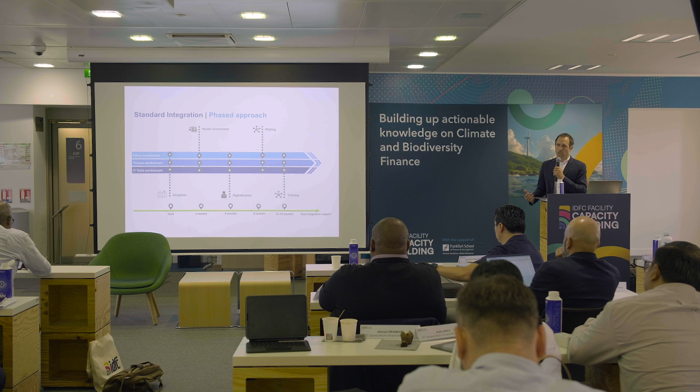We basically look at what countries have, meaning the tasks, processes, systems. Sometimes they have very efficient systems when it comes to project management, or even the use of AI, and Rwanda is a good example. So we look at what's the landscape, then we look at what are the needs from the country, and we customize the platform accordingly. Because one size fits all doesn't work.

So I will show you quickly what it looks like. And as I said, we have 17 countries at the pilot phase, and most of them now have passed the training phase and online support.

So it's a web application. It's available on any browser. And you need, of course, a login and a password. Because as I said, it's the government's tool. It's your tool. No one can access it. But once it is implemented, then the different government officials have a login and a password.

What I'm going to show you here is an example of Brazil. These are not real projects because for obvious reasons we don't have access to the projects, but just want to show you some functionalities. For example, systematic data collection.

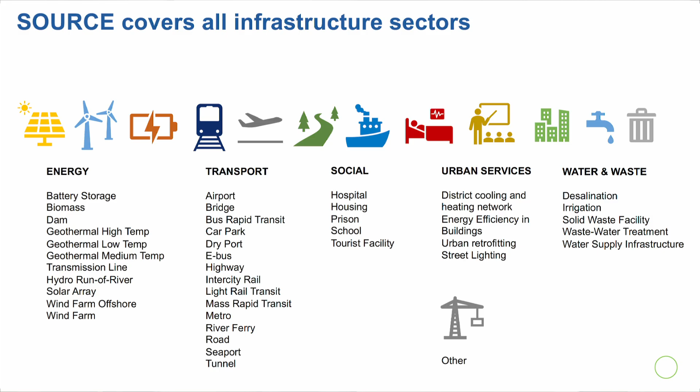Also unsolicited project proposal that was done with PPIAF from the World Bank. Those are the 40 subsectors. So we have developed that with the countries where we are working because sometimes we didn't have some subsectors, so we developed them with them. And when we have a new request, we basically work with the private sector in order to identify what technically should be developed in order to develop this type of new template.

So there are different steps, as you can see here. So some countries it's only 4, some countries it's 5. In Indonesia, I don't remember exactly.

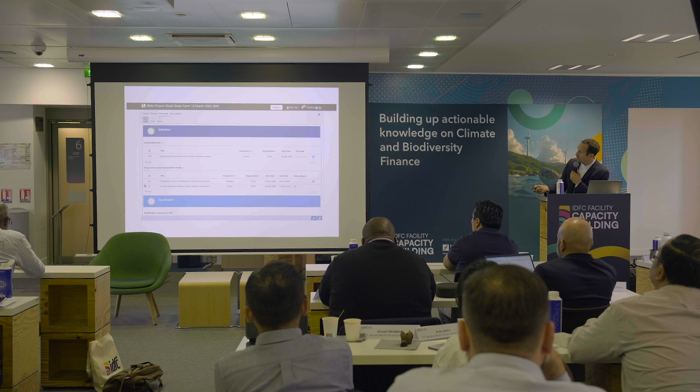And then what it does, it basically, based on the parameters of the project, then it creates different tasks. And it's basically a step-by-step process that the country is going through. So for example, you can see here the task, who it is assigned to, the organization, start date, end date. Very simple project management tool. It's Asana type, or Microsoft Project, or other type of tasks. The thing is that it's not common in governments to have that across ministries.

The objective is to make sure that from one ministry to another, all the different tasks they have to go through are actually digitalized, and then they just have to go through a step-by-step process.

So who are the users of the platform? Well, it's usually the project officers from the different line ministries, because that's where the data is coming from. Sometimes it goes through the Ministry of Planning, like in Indonesia, it goes through Bappenas, because the requests go through the planning, then through the process, and then MOF is involved, and others too.

In South Africa, the projects are sent to ISA, Infrastructure South Africa, which is under the presidency, but the projects come from the line ministries, and then ISA validates whether a project is priority or not. But then Treasury is also involved at some point.

In Brazil, it's both, from the line ministries, but also from the presidency at PPI. So usually it's project officers, but then sometimes in countries you have gates when the project has to be approved to go to the next step. Does that answer your question?

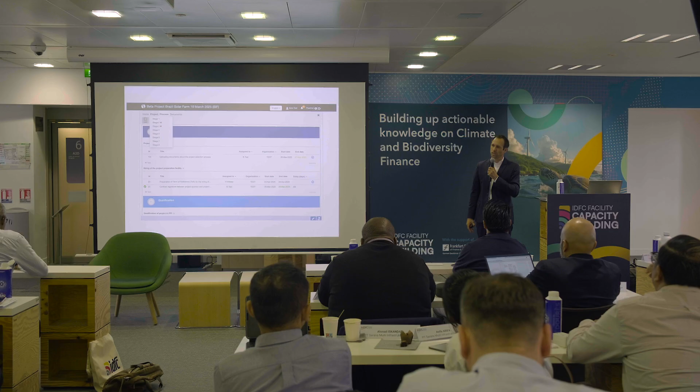I'm from the DBSA, and we also fund projects in preparation. Some of those projects we partner with whichever respective department wants to, say, eventually issue an RFP for PPP, and we would fund some of the development work. I wanted to find out, is this something that could be useful for us at DBSA to monitor the progress of that project, so we see what's happening on the government side as well? Often we rely on the steercos to get updates, and it would be good if we could have viewing rights or whatever to this, because we also have a vested interest in the progress of such projects.

It's a good point, and as you know, South Africa is going to go through a major restructuring when it comes to infrastructure, with a merge of different departments. We're waiting for that to happen, which should be around next March. But in the meantime, we are working with Treasury and ISA to move forward, because there is a new platform that will be launched by ISA in August, and we want to connect with them and also work with Treasury.

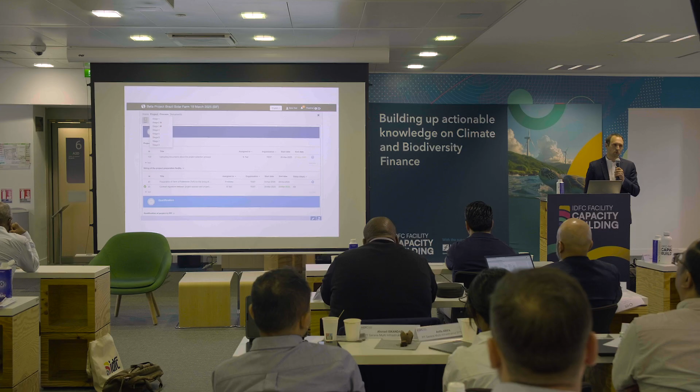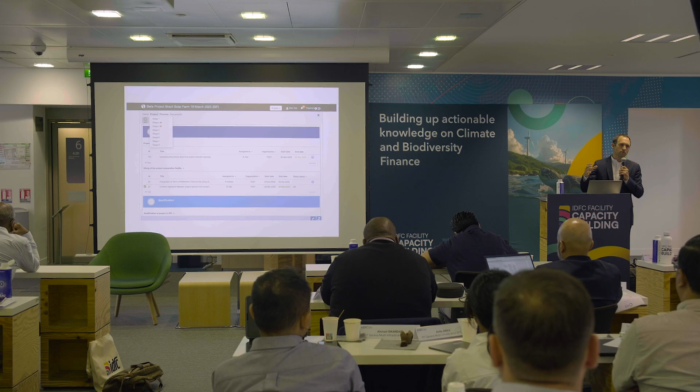This is something we also promote with Bappenas in Indonesia, which has the PPP joint office, so PTSMI is also involved. That's why in some countries it's easier to connect with others. But maybe what's nice here is there's some request you can send to me, and then we connect with the people in South Africa, and we can have a chat. The objective is to highlight what is being implemented, the successes we're having with countries, and how we can make it more efficient for the PDBs.

So the series of questions we have, what we do is align them to the source questions. You remember the templates, the 40 subsector templates? We merge them to make sure that when you go through a project, you're not only going through your task, but also through what investors expect to see when projects are publicly tendered - it can be governance, cost, technical, or legal questions.

You can see that the types of questions we have are numerical, multiple choice, proposed answers, and sometimes we have international best practices embedded into it. Why? For example, here the IFC performance standards - the objective is to provide knowledge and guidance at the right juncture, because project officers have tons of reports they have to read, and a lot of knowledge from our fellows, from donors or multilateral development banks.

They are great, but they are on the shelf, and you have to find the info exactly when you are preparing the project. So, for example, what is an NPV? How do I do a CBA? Or how do I do a traffic forecast? All of this is available somewhere, but you have to find it. So the objective here is to make it available at the right juncture. These are some of the international best practices that we have digitalized into Source.

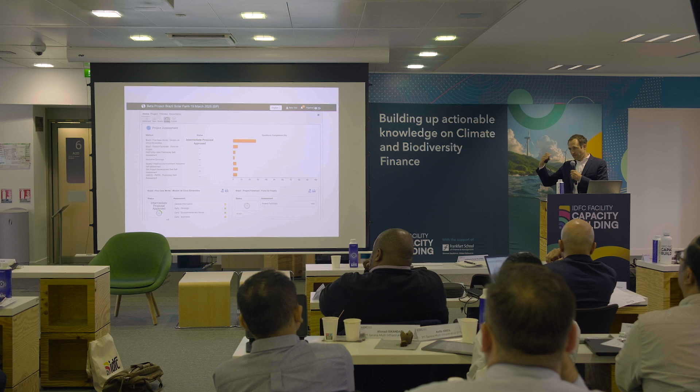So what we did, we just made a matchmaking between their criteria and our questions, so that while they are doing their studies, reports and assessments, and going through the platform, they will automatically be able to see how the answers are attached to what they need. And then they can do a manual go, no-go type of process.

So this is what it looks like in Brazil. You're going to have their different criteria on the left, the completion on the right, and what they decided to score the answers to. And they decided to use a traffic light system.

So you can see here another project assessment that we basically aligned to the source questions. When the project is ready for tender, or whatever the jurisdiction is requesting the government to do, it can be right from the beginning because of the law that it's a PPP, it has to be publicly available right away. The government can publish the project.

What that means is that the government decides when it is publicly available and what is publicly available. So it can be assessments, documents, contact information. There are different ways to publish the different information of the project.

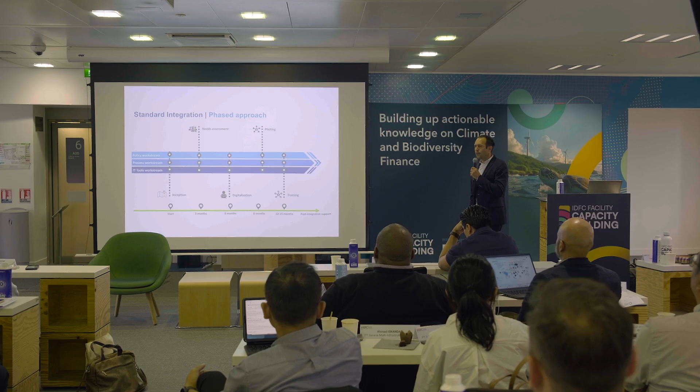I'm not sure if you're able or willing to share, but how much does it cost to implement such a system? Oh, it's publicly available. It's 300,000 euros to implement the platform in a country. It's usually a 12-month program. And what we are working on now with the German government is to extend the assistance.

Because what we realize is that once the platform is implemented, there are so many trainings to do, so many follow-ups, so many people to talk to, and there's a need for clarity with new people, people changing from one ministry to another, change of government. Oh my gosh, it's a nightmare. But what we see is that because we're a public good, we continue to support them. That's why we have post-integration support.

For example, in Indonesia, the technical assistance finished last year, but we continue to work with them. South Africa, finished two years ago, but we continue to work with them on a daily basis. So what we realize is that we should have at least a plus-one-year period after the technical assistance. We estimate, though we haven't tested it yet. We are doing it with GIZ in Senegal, implementing Source there now.

I'm going to Senegal at the beginning of August to launch the platform with the government, and we're expecting at least a year of support after implementation. We estimated roughly 150,000 euros, but also for the local consultant, because we always work with a local consultant. So now I'd say 450,000 euros for 2 years.

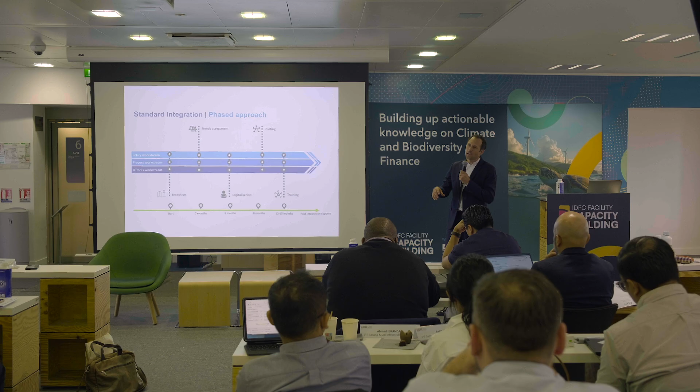We compared ourselves with other consultancies, and we are four times lower. But the reason we can be lower is because we do it at cost, and we also do not outsource the IT development. Everything in IT is inside the team, so we don't outsource anything, and that's where we also save costs.

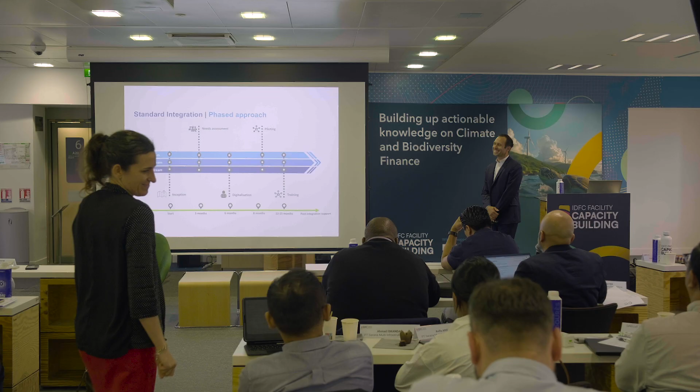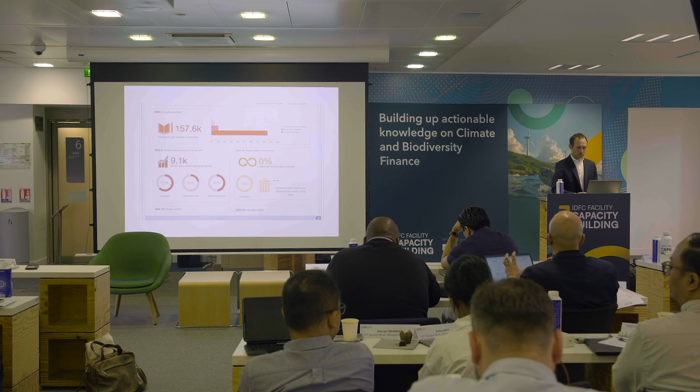I also have some words on AI before the end. Just a question on some of your focus areas on infrastructure. I was looking at the sectors, and I think there's a strong mitigation focus, at least from a climate perspective. I wanted to understand, in terms of climate resilient infrastructure, to what extent—I know that falls under sustainable infrastructure, but in the specific areas there.

I don't know if there would be any adaptation or resilience focused interventions, or is it more mitigation focused? I think it's logical, but adaptation and resilience is not a subsector for us—it should be involved in all subsectors. So we have questions on resilience and adaptation in all the templates, in all the sectors. This is how we've drafted it. For example, we have environmental questions, and a climate section to make sure those questions are properly addressed. The reason we're not doing it separately is because we're working with the MDBs, and we work with the insurance industry.

And the insurance industry has invested a lot of time in reviewing the templates. Why? Because they want to make sure that a project that is insurable is a project that is investable. But to make sure that the project is insurable, they need to make sure that the climate risks, health and safety and fire, contractors management - all these risks have been addressed.

And there is an insurance coverage checklist in the platform to make sure that at least the government knows from an insurance perspective where they stand. And we did that because we work with 14 countries in the Pacific Islands. So the Asian Development Bank is going to fund the integration in those 14 islands, and they need resilience. So that's why we wanted to make sure that Zurich, Swiss Re, WTW and others were validating the need first for such a platform, and then a dedicated tool to make sure that insurance is covered, so that the projects can be insured and you can attract the proper investors.

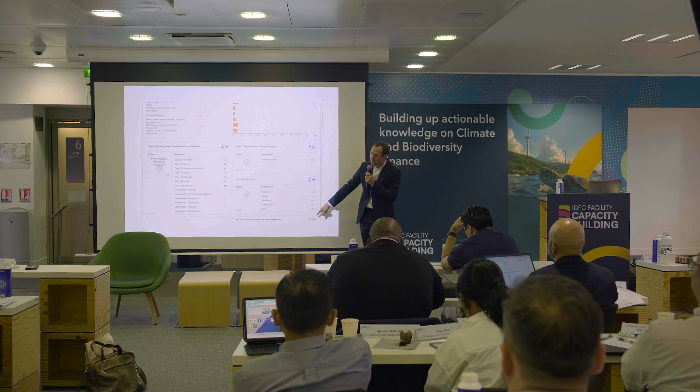Yes, of course we are not there yet because SOURCE started to be implemented in the first country in 2022. And we have this insurance coverage module, so it shows from the different perspectives how the insurance coverage has been addressed, to make sure that, again, from an investor's perspective, they know that over the lifetime of the asset it is being covered, even during operation and maintenance. But that's going to be the exciting part - collecting the data and enabling the government to compute that and see what's going on.

I have a question on the potential support from the MDBs. Is it integrated - like available technical assistance or grants - that could possibly be aligned with the project that is already listed? Yeah, so the way that we work with the MDBs is usually, well, it's only grants.

So we don't have concessional loans, we only receive grant funding. And the way they approach it is usually from an existing project through a technical assistance or a trust fund. And then they justify it, because SOURCE is about SDGs, it's about digitalization, it's about cybersecurity, it's about governance improvement. So there are many checks that SOURCE covers, and that's how they justify taking the funding from different TAs or trust funds. Does that answer your question?

Like, for instance, because it's very comprehensive, right? In SOURCE you take step by step all the project preparation from the very beginning until COD. I'm just wondering if the platform also covers any potential support, concessional loans, or grants from the MDBs - like ADB, SECO, World Bank - that could possibly support the project itself, that we can tap into. Because sometimes it's not readily available, sometimes it has to be person to person. But I'm wondering whether the platform could possibly provide that as well.